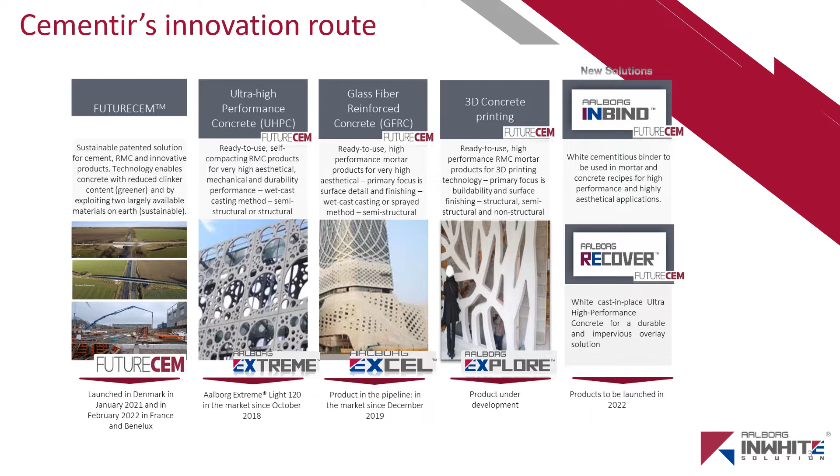Before going into details about InBind, it is important to remember the concept of UHPC. UHPC stands for Ultra High Performance Concrete, and UHPFRC are the initials for Ultra High Performance Fiber Reinforced Concrete. Due to the brittle nature of UHPC, fibers are always part of the final solution. Therefore, we will define UHPFRC as a hydraulic cement-based composite material which combines at least these three concrete technologies.

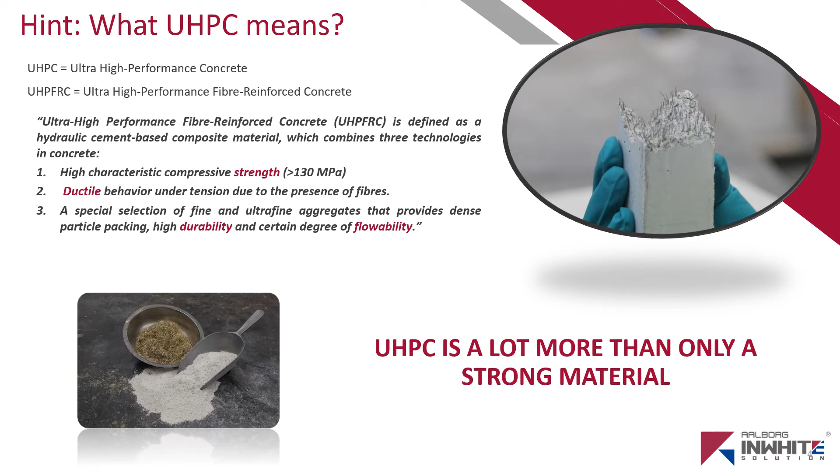The first one, high characteristic compressive strength, which is more than 130 megapascal; ductile behavior under tension due to the presence of fibers; and a special selection of fine and ultra-fine aggregates that provides dense particle packing, high durability, and a certain degree of flowability. The most important message about UHPC is that it's a lot more than only a strong material. It is a material with properties between steel and concrete and with an outstanding durability.

So, what can UHPC bring into the construction business that might be valuable? Well, let's focus on three properties. First, flow. UHPC can be designed to be either self-compacting or thixotropic, allowing it to fulfill an extended variety of applications and production processes. For example, self-leveling materials come very handy in the precast segment, where UHPC is being massively used right now.

Second, the mechanical properties. Its high compressive strength and ductility due to the fibers will allow for a significant reduction of the element thickness and weight. This translates into material savings, which will impact cost, but will also reduce the CO2 footprint of the elements. Third, durability will have a huge impact on the maintenance cost, especially when talking about infrastructure where the costs for maintenance are so high.

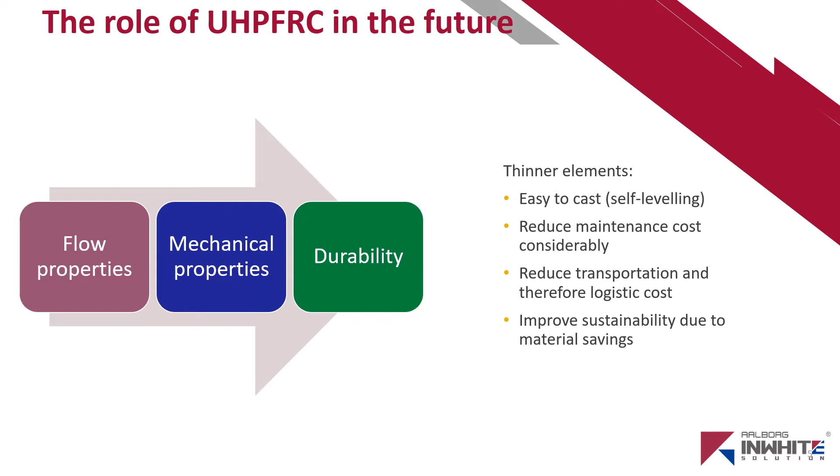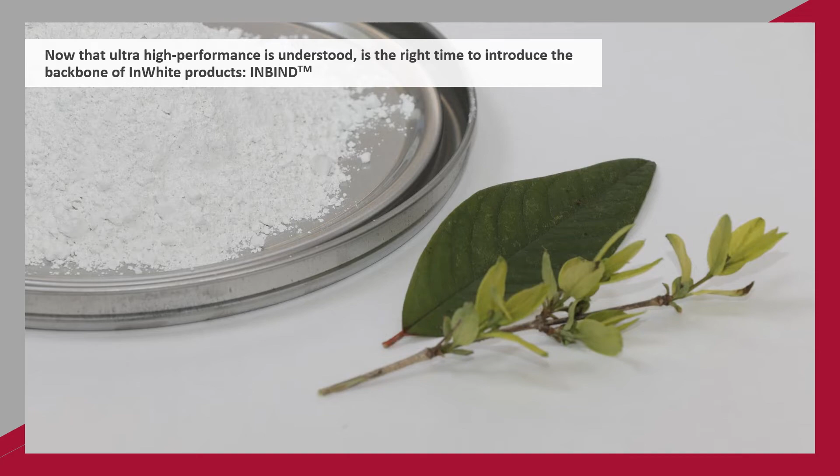Now that ultra-high performance is understood, it's the right time to introduce the backbone of InWhite products, InBind. Now it's time to talk about InBind itself. InBind is the binder used in all our InWhite products, Extreme, Excel, Explore, and Recover. It's based on FutureCem patented limestone calcined clay technology, but using the highest quality raw materials to ensure the highest pozzolanic reaction and whiteness.

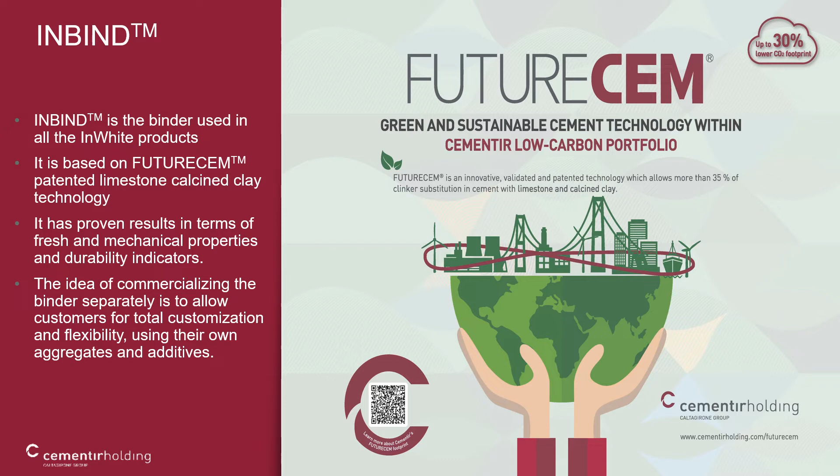InBind has been tested by selected customers with good results in terms of fresh and mechanical properties, and durability indicators. The idea of commercializing the binder separately is to allow customers total customization and flexibility, using their own aggregates and additives. With our technical support and our customers' practical expertise, we will be able to develop together mixes that fit their own production process and achieve the mechanical and durability properties that they need.

If we must condense in one slide the main benefits of InBind, then this is the one. By using InBind with the right aggregates to ensure the maximum packing and also with water to binder ratios between 0.21 and 0.27, ultra-high performance is guaranteed.

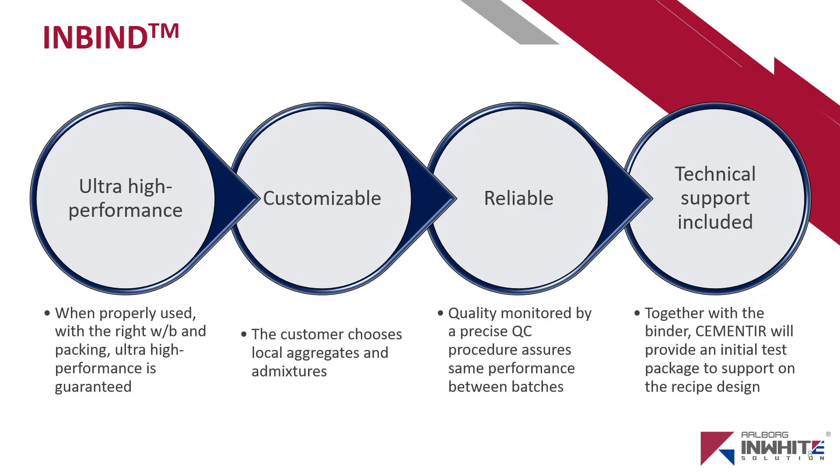Also, InBind allows for a high level of customization because the customer is the one choosing the sands and admixtures from local source. The performance is reliable and will not change from batch to batch due to our continuous monitoring of QC indicators. Finally, but also very important, Cementir will provide an initial test package to support the customer during the initial recipe design.

I want to highlight some of the benefits and features of InBind, such as high early and final strength, whiteness, which allows to add pigments and target specific colors, flexible solution using local sands and additives that will fit the current production facility and process at the customer site, and technical support included with the solution.

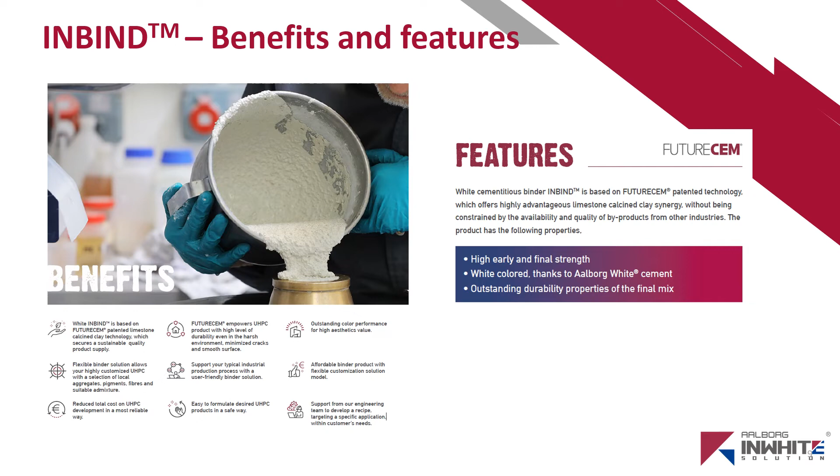The binder can be used for wet cast applications where high strength and durability are required. For example, UHPC sunscreens, facades, panels, structural elements, outdoor furniture, and a lot more to be explored.

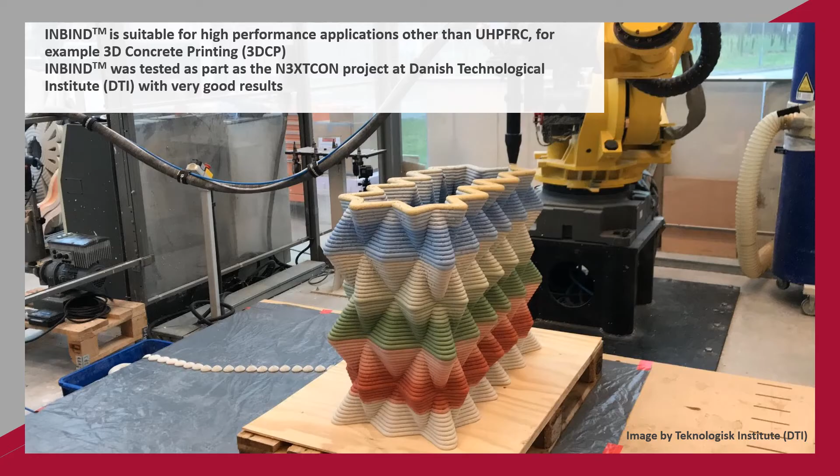This is a very good example of high-end application using InBind. The product was tested using a 3D concrete printing recipe as part of the N3XTCON project at Danish Technological Institute, the DTI, with very good results. And this element that you can see here was actually cast with InBind. So you can see how much the high performance, but also the whiteness will help to achieve a very beautiful and very good product at the end.

In the next slides, I will show some mechanical and durability properties that UHPC mixes with InBind achieved. In terms of mechanical properties, we were able to achieve mean compressive strength of more than 130 megapascal in 10 by 20 centimeter cylinders, with flexural strength of more than 20 megapascal. This mix has a water to binder ratio of 0.21, 3 sand ratios, and 200 kilos per cubic meter of steel fibers. By changing the sands and water to binder, different mechanical values will be achieved.

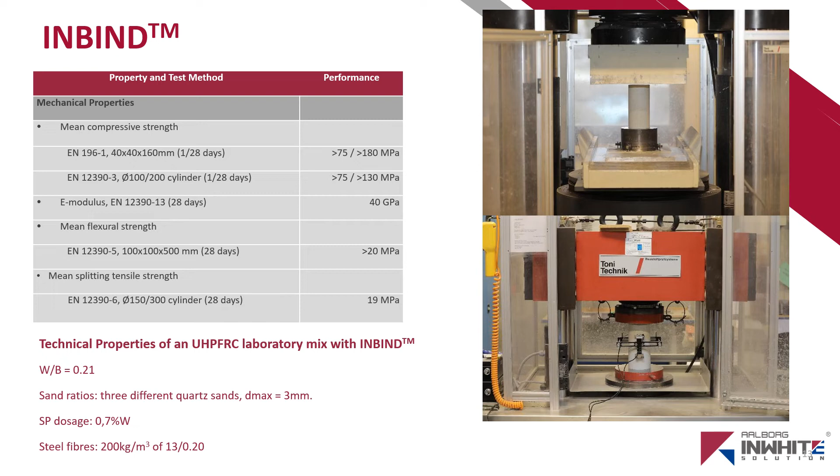We measure lots of durability indicators of all our products. I will share in this presentation just a couple of them to illustrate the behavior of the binder. You can go to our website and get the product information sheets and brochures for more details.

The chloride diffusion coefficient was equal to 0.27 times 10 to the negative 12, while for traditional infrastructural concrete it will be between 0.9 and 2. Such a small value could lead to potential cover reduction between 45 and 63%, which is a very promising result in terms of material savings.

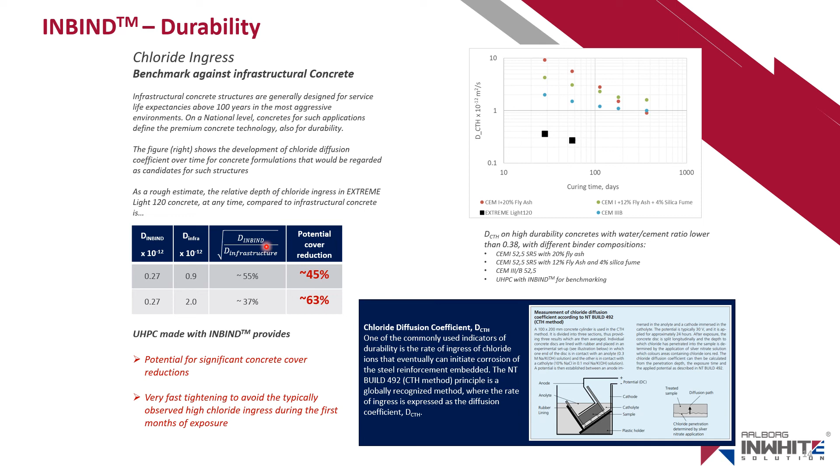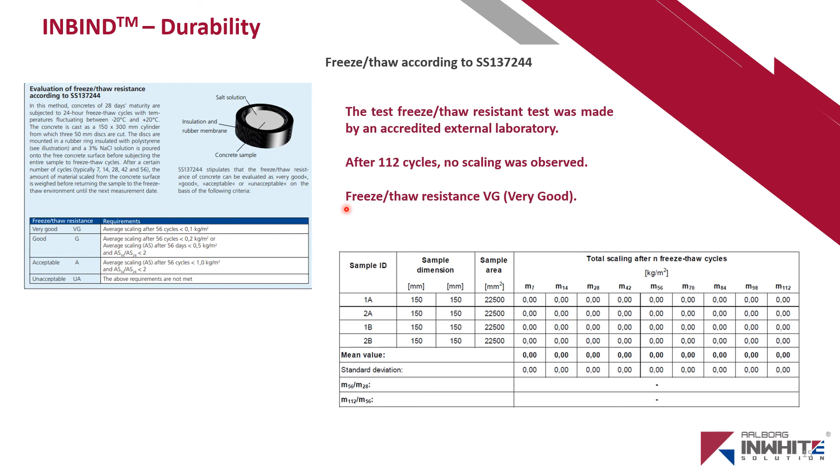For EXTREME Light 120, after 112 cycles, no scaling was observed. So the material will qualify for very good in the freeze-thaw scale. Even though we are referring to EXTREME, the durability indicators measured in all our products show the same level of performance. Well, I hope that after listening to this short introduction, you have a better understanding of the InBind performance.